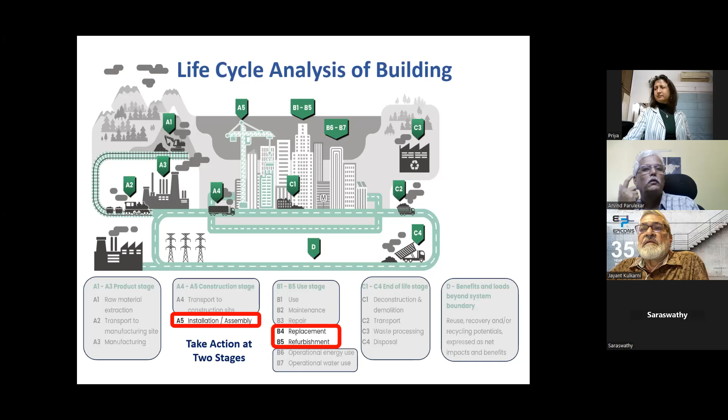EFC has conducted 84 workshops in the past 24 years and 44 webinars, now it is 45 webinars in the last 4 years. We started the webinar series since lockdown through our unit EFC dedicated to training. These are the 2 photographs of physical workshops conducted in the past, workshop 55 and workshop 70. EFC is a humble effort to create a knowledge sharing platform and develop a facility for continued education for practicing architects, structural engineers, corporate consultants, governments and government authorities, builders and developers, and of course, faculty and students.

Today we are at webinar 146, latest technologies in corrosion mitigation and sustainability. And the next program we are proposing is on earthquake engineering. It might be a physical program on 18 January 25.

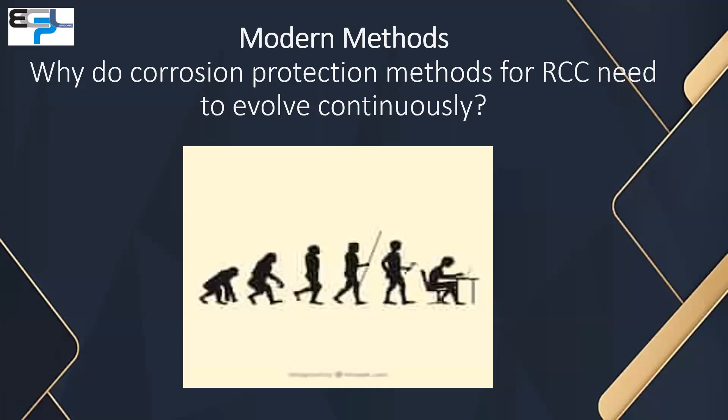I'll be putting my thoughts on why corrosion protection methods for RCC need to evolve continuously.

Corrosion of iron is not new. In human civilization, there was a Stone Age, Bronze Age, and then Iron Age. Discovery of iron is almost 3,500 to 4,000 years old. Variously, it is considered that it was developed in some part of North Africa. Some say that it was in the Sumerian world. But leaving that aside, the history is quite old.

The use of iron was very much important for maritime development, I mean the shipping industry. Seaworthy ships had hulls made of iron, and they faced this problem of corrosion some 250-300 years ago. People found out various solutions like using copper, zinc, various kinds of coatings, coal tar coatings and oil coatings, etc. So this struggle is quite old.

Moving ahead, the oil and gas sector, these are mostly in coastal areas and they face this corrosion problem, and they have developed methods like anodic protection, cathodic protection, impressed current protection, so many things.

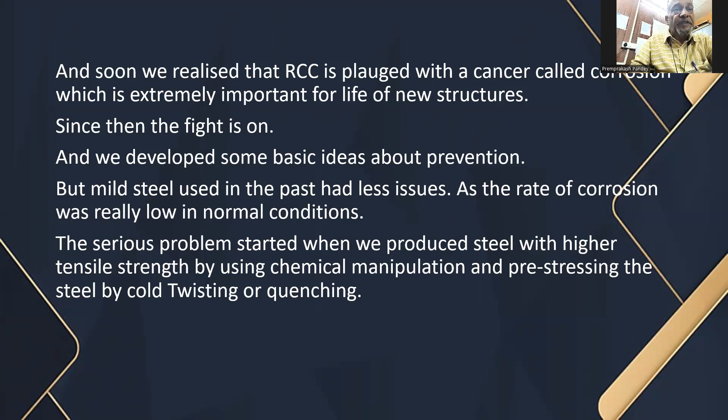Now the basic corrosion fighting mechanism - what we used to do some time back to fight corrosion - had simple formulae: dense concrete with as low permeability as possible, proper cover (all our codes define minimum cover for various elements because the depth of cover is one of the defining characteristics of an RCC element for durability), and third, regular maintenance like painting, and keeping RCC elements away from dampness and stored water, etc.

For a long time, we were putting stress on these three things, and these were effective too. But it has come to our notice that these are no more sufficient. They are effective, but not sufficient. Now let us try to know why it is not sufficient, why we need to evolve, why we need modern and different technology.

There are probably four important factors - there may be many, but I have listed only four. One, constituent materials are changing: cement is getting finer and stronger per unit weight, steel is doing the same thing, and chemical and physical properties are changing. Second, performance demand is changing: earlier RCC structures used to be quite humble, and now we are making massive structures using RCC, and such use demands different kinds of physical properties and performance criteria.

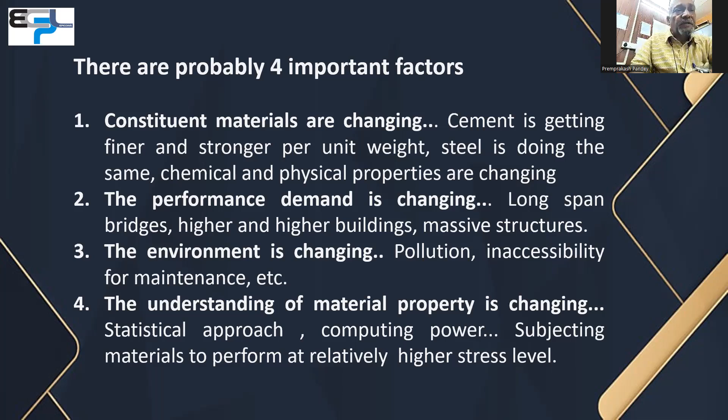So these are the factors making it necessary to evolve our understanding of corrosion. Now, change in material properties - let us say cement. Some time back, we were using cement grade 33, then came 43, then came 53.

Thereafter, number of microfines—microsilica, fly ash, GGBS, and many other kinds of additives are there. Now, pH retention time is reducing as more material gets consumed faster. Why? Because we are using finer material, more surface area is available for hydration in a shorter time. So if you are putting 400 kg of grade 33 cement, complete hydration takes say 60 days; for grade 53, the same thing happens in 15 days. So more material is being consumed, and therefore pH retention time is also reducing.

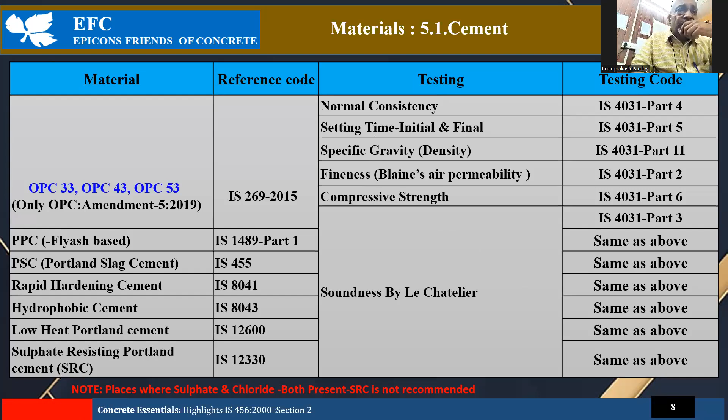Next slide. This is just a table to show OPC 33, 43, 53. Then comes PPC, PSC, rapid hardening cement, hydrophobic cement, low heat Portland cement, sulfate resistant Portland cement. So these are the things changing. Then there are other fine materials, and there are numerous additives. Next.

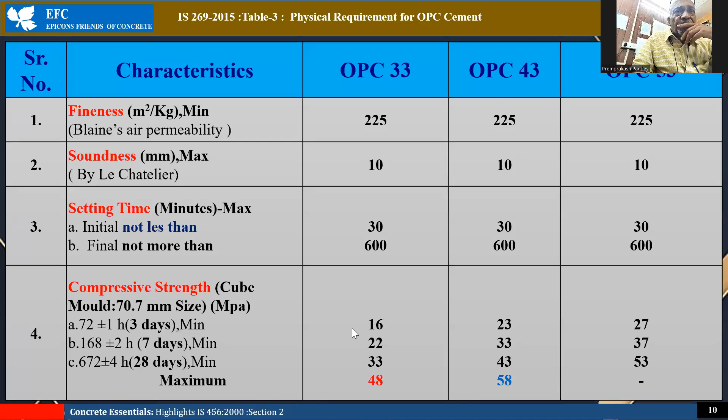Grade 33, 43, 53—various properties. Next.

Now, second is that performance demand is changing—ever increasing scale of structures, as I will show you in the photograph. What exactly is happening is that physical properties are being modified using new materials, pushing the limit of working stress towards the fatigue threshold. We almost don't go to that extent, but it is moving in that direction. Concrete, RCC, is subjected to a higher stress level than it used to be some 50 or 60 years ago.

Environment is changing too, as I will show in some photographs. Carbon dioxide is increasing due to fossil fuel consumption. Sulfur oxides are also increasing in the atmosphere, and sometimes there is acid rain.

And when I say increasing use of untrained or poorly trained workmen, I take it as an environmental factor. In the construction industry, the demand of development is so high that there is an acute shortage of trained workmen, and that is being fulfilled by partially trained or untrained people. Because of that, very important factors like maintaining proper cover all along the RCC structure elements, quality of cover despite very heavy reinforcement, and commercial pressure to keep thin members—thin columns, thin beams, especially in the residential sector—become environmental pressures, including commercial pressure for designing structures which have inherent potential for deficiency. All this has to be taken into account while we think of mitigating the rate of corrosion.

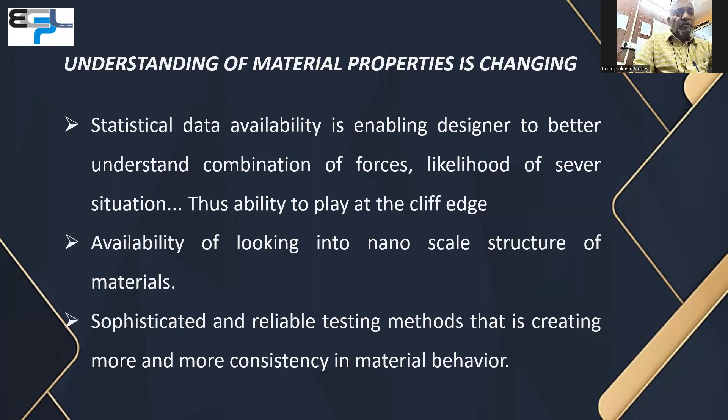Now we are talking not about microscopic understanding, but about nanoscopic understanding of material. So you will see in the next slide.

These are important for the binding property of the cement, the forces which are called van der Waals forces. These forces are surface attraction forces because of the closeness of different molecules, and these are other than electromagnetic forces. They are developed because of the close proximity of different molecules.

Now this is the kind of understanding we are having, how actually the cement develops binding property, what kind of crystal formation is there, how we can increase those kinds of fibrous elements and crystals which create better strength or better bonding. And that is giving us ideas about making cement more efficient.

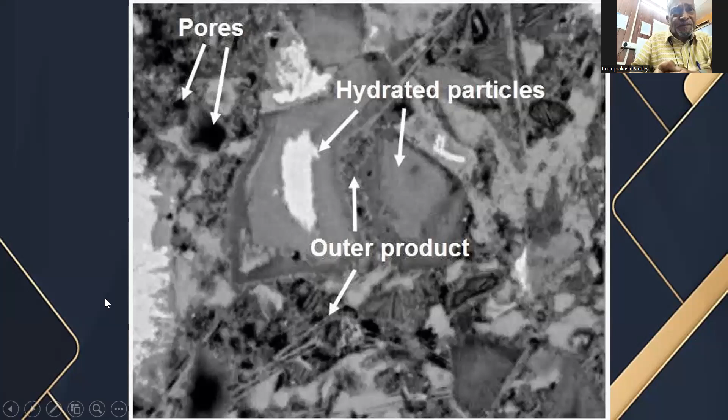See, this is an electron microscope photo of the surface of a cement particle. Can you imagine what kind of insight science is giving into understanding of material? This is mind-boggling, and this is helping scientists and production engineers create new technology for better material, for better chemical manipulation of the material. So this is changing the material properties like anything.

We could compute data and explore the trend of the data, which is very important for producing material with great consistency. In all engineering structures, consistency in the behavior of the material is very, very important. Our design is based on assuming certain consistency, certain repetition of behavior, certain percentage of failure. The more data we have, more experiments we do, more practical data we gather from the field, the better understanding we have of the material, and as I said earlier, better we can push the limit, and we can make the material perform at higher stress levels.

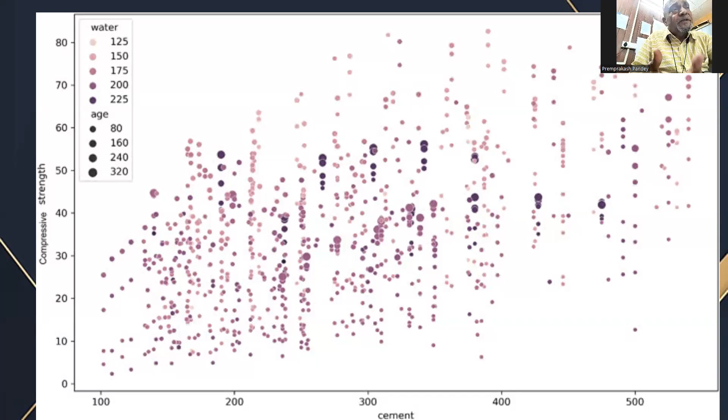As concrete is changing, cement is changing, steel is changing, as the use is changing, it is creating an environment where corrosion is faster. And similarly, the corrosion fighting mechanism is also evolving and changing. We are getting new insight, and therefore there is new kind of material, organic and inorganic. Some of the methods which we are using may not be new.

Some of the methods use zinc. The use of zinc is as old as the shipping industry, when steel ships with steel hulls were constructed before steam ships. The major problem was corrosion of the hull, because it used to be in seawater. People started using zinc as a mitigation measure, since galvanizing uses zinc. Galvanized iron is quite old technology, not new.

However, use of zinc as a sacrificial anode in concrete is not old. It may be very recent in our country, but it has been used for a couple of decades in Western countries which face corrosion as a major problem. So some of what we call latest technology is repurposing of well-known methods, being brought into the building industry.

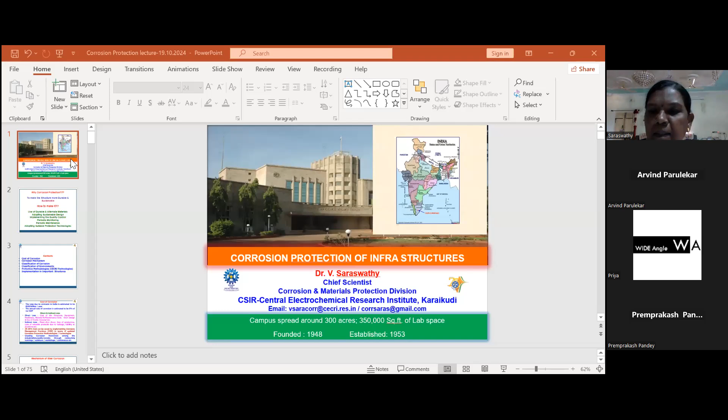So today's topic is corrosion mitigation and sustainability. Why do we have to mitigate corrosion? If you are mitigating corrosion, you are making the structure stronger, more durable, and more sustainable. How to make it? By using durable materials - if you use the same material for a long time, it may get depleted, so you have to use alternate materials. Then adapting sustainable design, implementing proper quality control techniques, periodic monitoring of structures, periodic maintenance, and adapting suitable protection technologies.

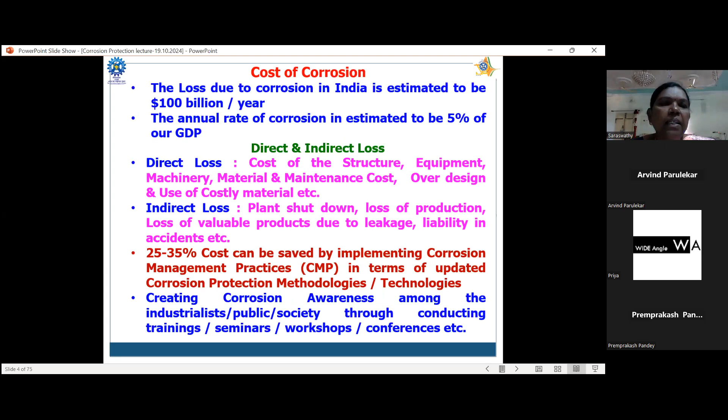The loss due to corrosion is said to be around 2 to 5% of our GDP. The losses are divided into direct loss and indirect loss. Direct loss includes cost of structure, equipment, machinery, material, and other maintenance cost. Indirect cost includes plant shutdown, loss of production, loss of valuable products, etc.

If you are adopting suitable technologies, you can save 25 to 35% of the cost by using the latest corrosion mitigation technologies, and also by creating corrosion awareness among industrialists, consultants, and society through conducting seminars, workshops, and webinars like this get-together. So I am not going very deep into corrosion because I have many slides.

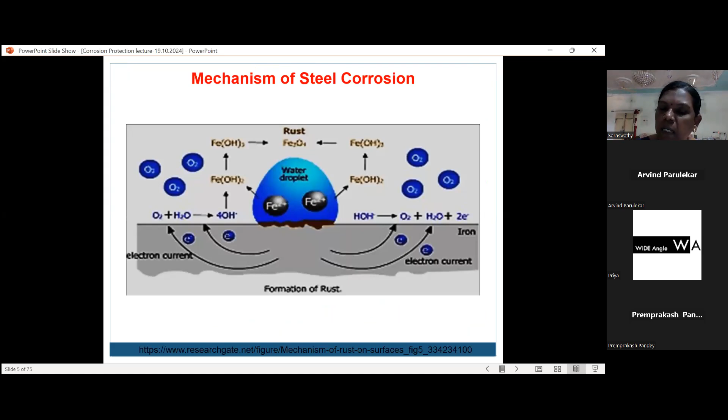Corrosion mechanism: if you expose material to the environment, it gets corroded using atmospheric contaminants present in the atmosphere. Iron, when oxidized, becomes 6 times more voluminous than the parent material. So the volume increases and ultimately the stability of the product is affected.

Corrosion is classified into dry corrosion and wet corrosion. Dry corrosion is a slow process, but wet corrosion is a fast process. Dry corrosion takes place at high temperature, but wet corrosion takes place at room temperature.

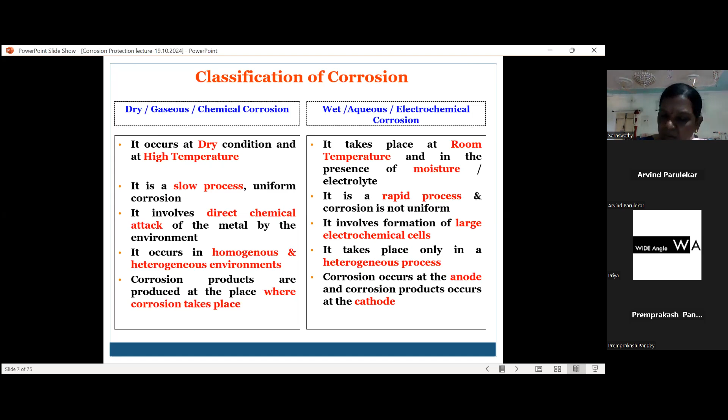Majorly, SCC corrosion is stress in the presence of environment causing stress corrosion cracking. This is present in underground pipelines and other important structures.

The classification of environment is based upon ISO 12944. Normally the classification is divided into C1, C2, C3, C4, C5, and CX. CX is the extreme corrosive environment - offshore areas that may contain high salinity, industrial contamination, and high humidity. Normally we encounter industrial environments with high humidity and aggressive atmosphere, which is C5 environment. CX is the recently added environment in the ISO 12944 code, said to represent extreme environmental conditions.

If you are using some paint in a C1, C2, C3, C4, or C5 environment, you have to test that paint as per ASTM B117 to know its durability - how many hours it can withstand. If it passes 1440 hours, then the paint may be durable for over 7 years. If it passes over 2000 hours, then we say the paint may last 7 to 15 years. Based on that observation, we concluded that if the paint passes 1440 hours, it will last for seven years.

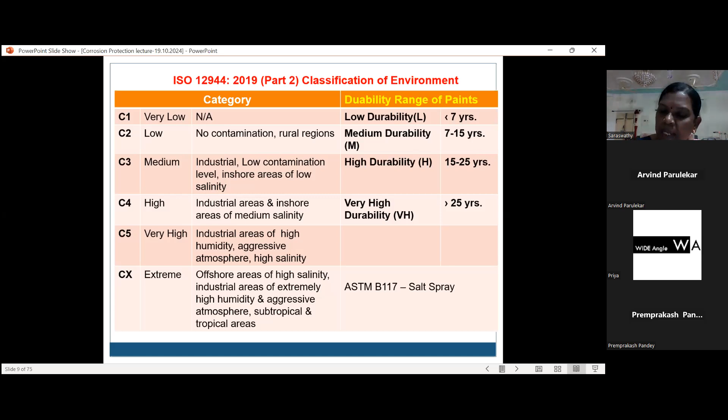So if it is passing more than 1440 hours, the paint will last for 7 to 15 years in the highly aggressive environment as per ASTM B117. So this is the durability of the paints we have tested, and for high durability paints, we can't guarantee any paint having higher durability, but as per standard, high durability paint will last for 15 to 25 years. But as per the prevailing situation, no paint will last more than 15 years as far as my experience is concerned.

So these are the corrosion protection methodologies. Normally we are following some paints and coatings, inhibitors, and cathodic protection. Other than that, these are the most followable methods. So paints and coatings, whether temporary or permanent protection, will give that protection.

So inhibitors may be anodic, cathodic, mixed inhibitor, VPI inhibitor, and green inhibitor. These are all examples of anodic, cathodic, and mixed inhibitors. Recently we are using bipolar inhibitors also, which is like a mixed inhibitor. So in cathodic protection, we are using sacrificial and impressed current systems, and anodic protection for particular protection of structures. Alternate improved materials are also used depending on the environmental conditions.

So what is the difference between paints and coatings? Paint is used for decorative application, and coatings are used for barrier or permanent protection. So paint is for temporary or permanent protection, but coatings are used for extended life of service. These are all the common terms which I am using - I am not going to discuss them in detail.

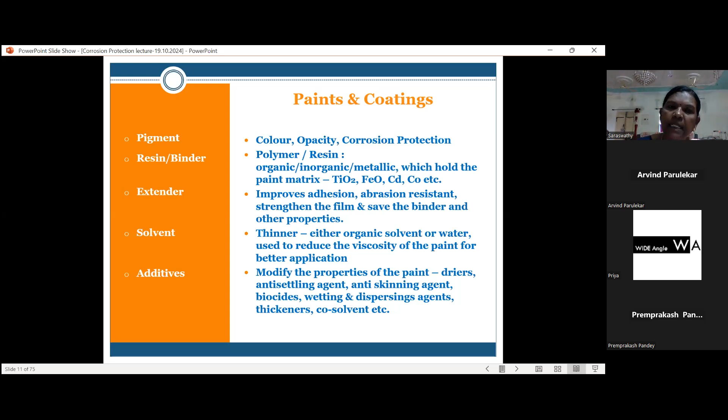So regarding sacrificial protection, the previous speaker has talked about it, but at CECRI we have developed sacrificial anodes for the protection of ship hulls, jetties, and underground pipelines also. Normally sacrificial anodes are used for protecting underground pipelines as well as jetties and other important structures. It need not require any external input or external power supply, but for impressed current system, it needs external power supply. So this is a major difference between the sacrificial system and impressed current system.

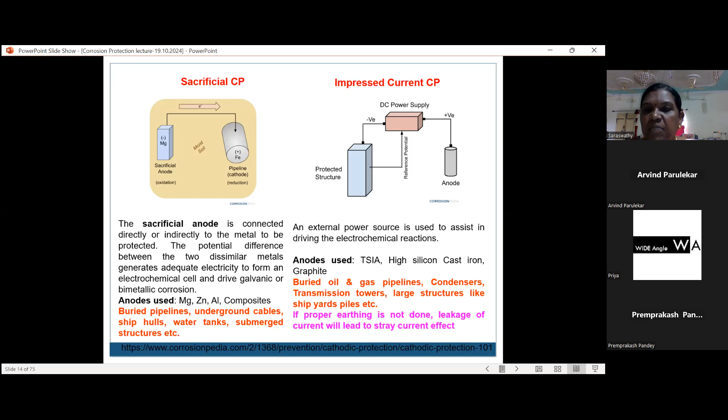In sacrificial systems, we use sacrificial anodes like magnesium, aluminum, and zinc as the anode. In impressed current systems, we use more noble metals as the anodes, like MMO, graphite, and other anodes. We also normally use high silicon cast iron as the anode for the impressed current system. So this is the comparison between sacrificial and impressed current systems - I am not going to go into detail.

So in CECRI, we are dealing with the corrosion and materials protection division. We are dealing with almost all the protective methodologies. For concrete corrosion, we have developed inhibitors. For cathodic protection, we have developed our own anodes. For biocorrosion, we have developed biocides. We have also developed inhibitors for both oil and gas industries, and we have been doing failure metallurgy and failure analysis of underground gas pipelines and other important industrial structures.

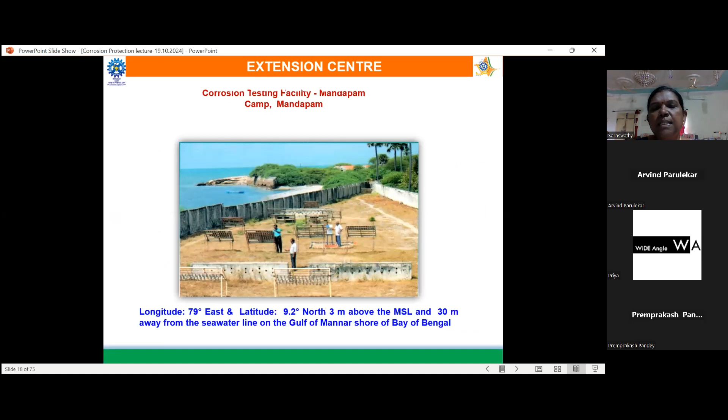So our main unit is placed in Karaikudi, and another small unit is placed at Rameshwaram. This unit is said to be the highly corrosive zone in Asia. We have collected the corrosion rate by exposing various materials over a period of 10 years, and found that this site is said to be the most corrosive zone in South Asia.

So we have carried out an extensive corrosion map of India by exposing these materials all over India, selecting 56 exposure stations. We did this from 1993 to 2004, producing a corrosion map which was very highly useful to almost all the industries.

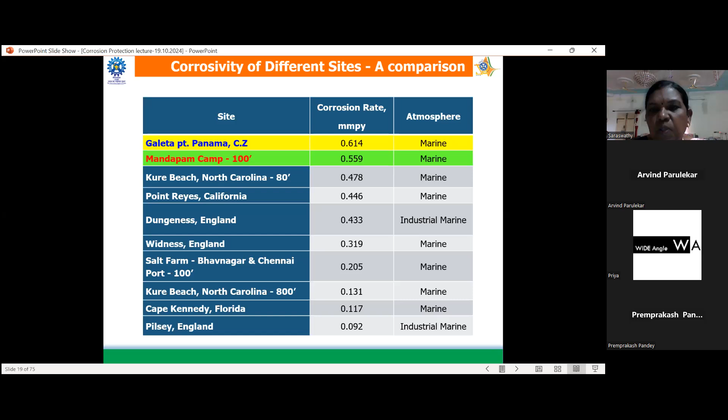The first one is a cement slurry coating, which consists of inhibitor plus cement. This is a 4-step process, and this technology has been used in the Pamban Bridge, located near Rameshwaram, the birthplace of our past president Abdul Kalam ji. This bridge is coated with inhibited cement slurry coating for the rebars, and presently it has been coated with the 4-coat system for protecting the external concrete surface.

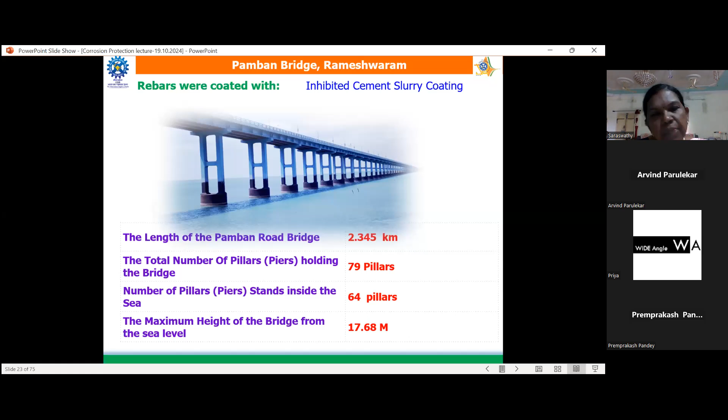Both these technologies were developed by CECRI, and till today the bridge is withstanding and sustainable because of the CECRI coating given for both the steel rebars and the concrete surface. Once in 4 years, the CPWD implements the 4-coat system for the entire bridge structure, and we go to the site for quality control of the bridge.

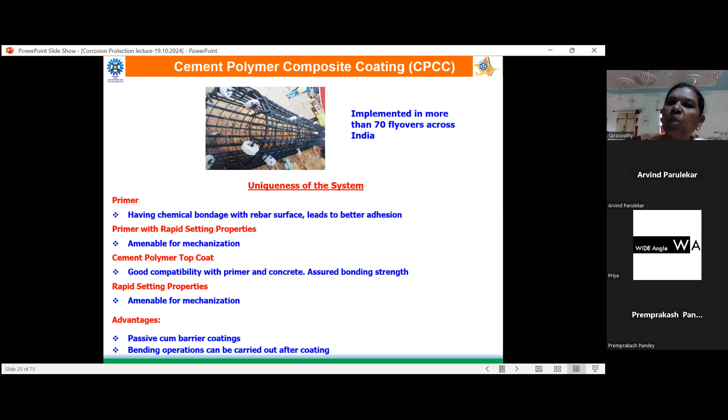This is the improved version, cement polymer composite coating. Here it contains cement plus polymer, whereas the earlier system contained cement plus inhibitor, a water-based coating. This new system has the added advantage of flexibility, which the previous coating did not have. This system has been implemented in more than 70 flyovers across India, with all these characteristics and features.

Each coat has its own significance. The initial first coat gives adhesion to the concrete surface, the second coat gives barrier protection, the third coat, since it contains TiO2, is highly weather resistant with breathing capability, and the aliphatic polyurethane coat is highly UV resistant.

This is the system which we have recently tested on this 100-year-old bridge under reconstruction in Rameswaram, the railway bridge. For the first time in India, they have used stainless steel rebars for the construction of piers and pillars, and they have used metallizing zinc epoxy, these two types of coating, for the entire bridge including the lift span. We tested this coating at CECRI and found that the system performs well in this harsh marine environment.

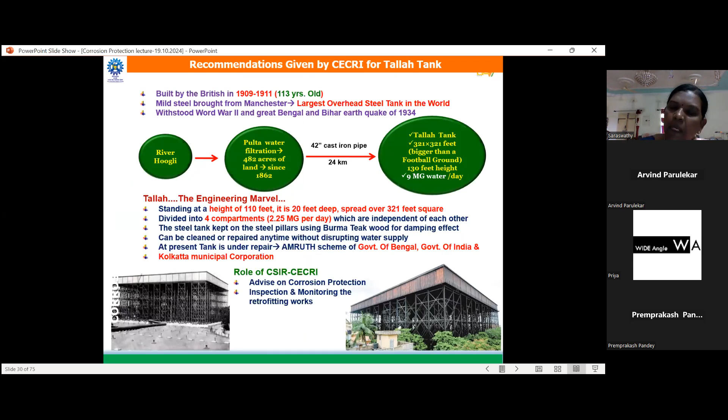We recommended internally the food grade epoxy, and externally we advised them to use zinc rich epoxy primer as well as polyamide epoxy and UV resistant aliphatic polyurethane for the external surface. For the internal surface, we recommended food grade epoxy since they are using it for drinking water purposes. The size of the tank is very big, more than a football ground, and they have completed the renovation. Now it is kept under use.

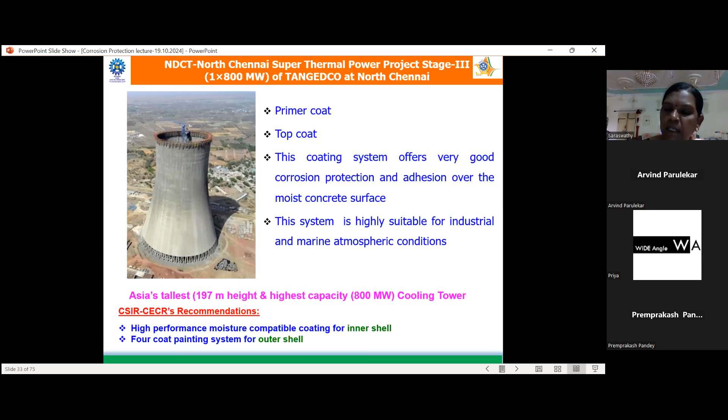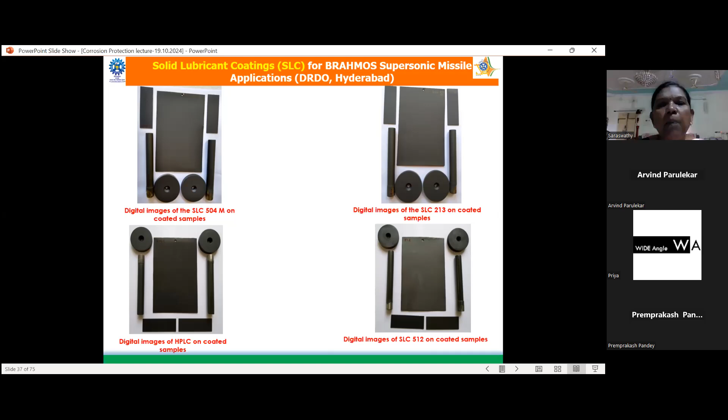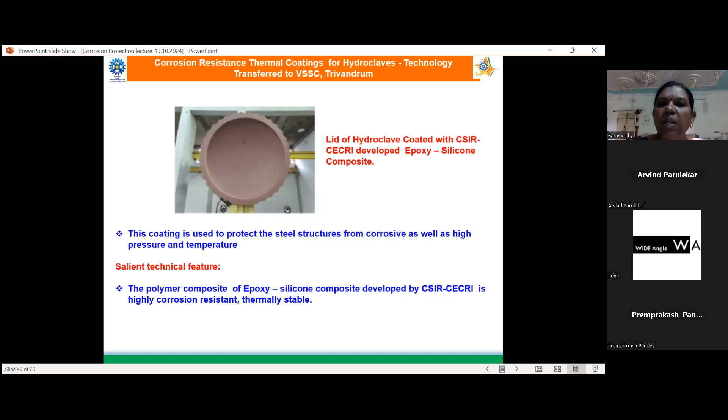They have been using this technology for protecting offshore jetties and other important pipelines. And this is another important technology which has been developed by us for protecting thermal coatings for hydroclaves. This technology is also for ISRO. We have developed a silicone composite, high temperature silicone composite coating, and this technology has been transferred to ISRO.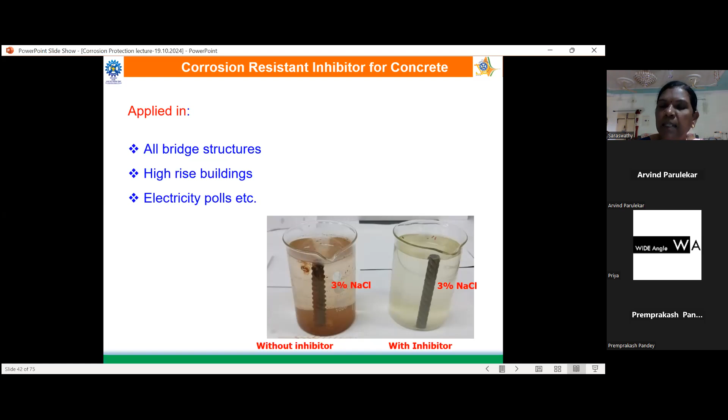So this is another important technology for concrete structures, highly based on inhibitor. Normally we use Portland pozzolana cement, which contains 25 to 30% fly ash. This fly ash contains some carbon and sulfur, which creates corrosion of rebars. To protect against that, we have developed this corrosion resistant inhibitor, and this technology has also been transferred to many licensees across India, and they have been using it for erection of electric poles and other important structures.

So this is another important project which I was involved in. This project was under construction in 2000. I stayed there for 2 or 3 years, and we installed our own sensors. This is the first cable stay bridge built, the Naini bridge, which was commissioned in 2004.

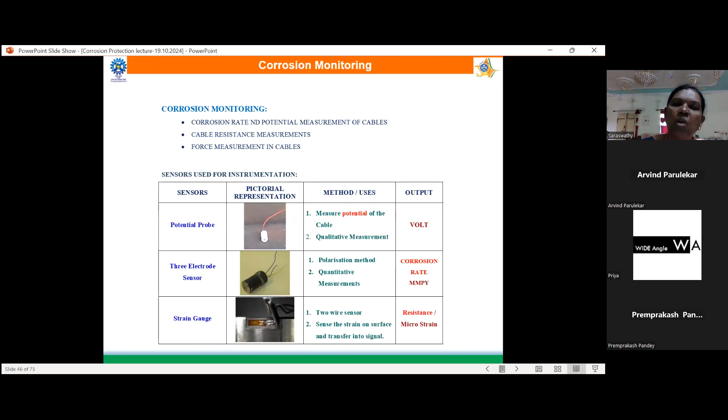During that period, we installed almost all the sensors: accelerometer, vibration sensor, all types of sensors, and the corrosion measurement sensors were made by us and also installed in that bridge. Over 5 years we monitored that bridge, and then it was handed over to the government.

So this is another important project which I took part in, the Kudankulam nuclear reactor, Kaiga reactor, and Tarapur nuclear reactor, for which we developed our own integrated sensors. Earlier we had been importing that sensor from abroad. After that, we developed our own integrated sensor and placed it in the dome for monitoring corrosion, chloride, humidity, resistance, and other parameters. This is another atomic power station where they have used our own sensors.

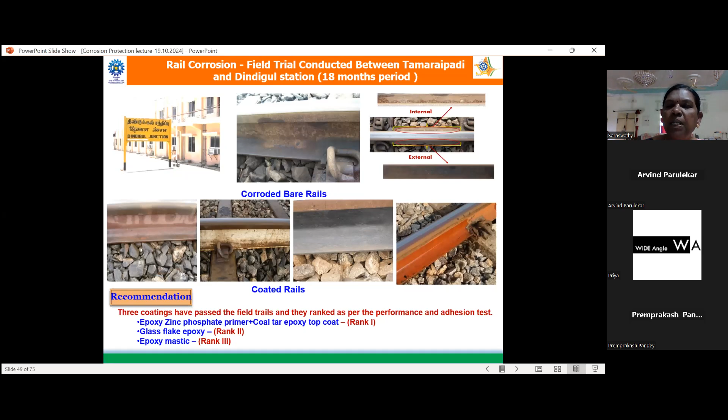So this is another important project which we carried out for RDSO. Normally during the morning hours, due to excreta and urinals, the rails get corroded. So they wanted us to develop a coating, and we developed 3 types of coating and tested them on the rail over a period of 1.5 years. We found that an epoxy zinc phosphate primer with a coal tar epoxy top coat performs better, and we handed over this system to RDSO.

And this is another important project we carried out for the Sardar Sarovar Dam project in Gujarat. Between 2011 and 2016, 18,000 tons of steel were left over in the ground. While they wanted to use it again, the government approached us, and we carried out an extensive survey over 5 years. We recommended that 90% of the plates could be used for the construction of the dam, and we submitted the report.

Because we have carried out the previous project for this Sardar Sarovar dam project, after that they made me one among the members of the dam safety board.

So their approach recently, the steel minister visited the Tungabhadra dam. It is 70 years old, and they wanted us to examine whether the life of the structure can be extended or it can be abandoned.

Normally the life of the structure is only 45 years, but we found that we don't find any single piece of material left over for examining the quality of the material.

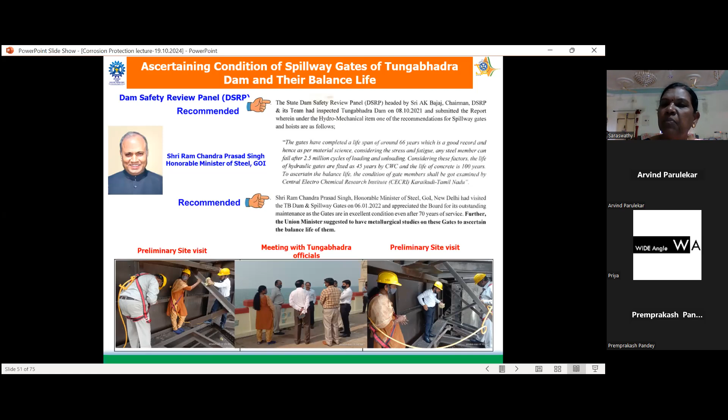We should not touch, we should not damage any of the steel, but we made our own measurements - cavitation measurements and other non-destructive measurements - and found that most of the spillway gates and skin plates...

...will last for another 50 to 60 years. So the government is going to save nearly 300 crores by making such type of assessment.

My team and myself visited the site. We stayed over there and took all the measurements, and we have submitted the remaining life of the dam. So this is another important project.

Everybody knows that this Thiruvalluvar statue is located in Kanyakumari, that is 133 feet height, located in the middle of the sea. So it is getting, due to the high tides and low tides, eroded.

So to prevent erosion, they wanted us to have some protection technologies. We have recommended to use silane siloxane based coating. Once in 4 years, they are doing the renovation and we are supervising it.

Along with the TTDC and archaeology department, I was made one among the members of the expert committee. Once in 4 years, they are doing it and we are monitoring the structure.

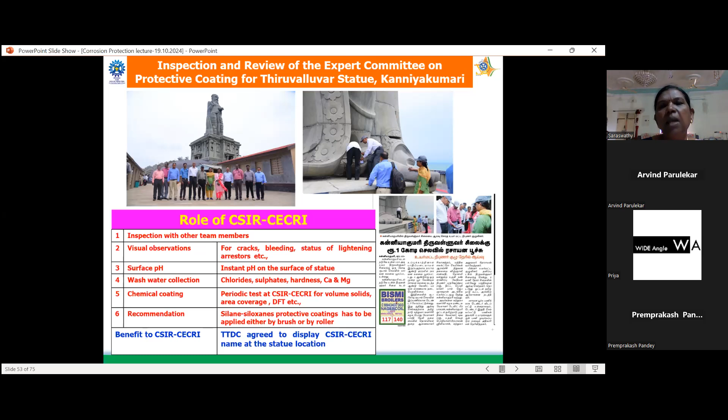So this is the type of coating which we have recommended, and they have used it, and they are also recoating the statue once in 4 years.

This is an integrated sensor gadget developed by us, and this has been implemented in the Kudankulam nuclear reactor, as well as single sensors installed in NFC Hyderabad, the zirconium sponge plant, and even in Naini Bridge.

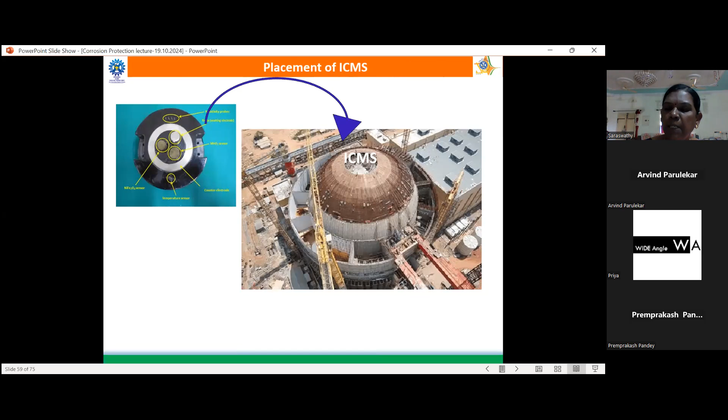We have installed a single sensor for monitoring the corrosion rate of the steel. This sensor gadget contains 5 or 6 parameters, but now we are implementing a single sensor for measuring the corrosion rate as well as potential.

We are implementing the sensor also in NFC Hyderabad. We have installed this sensor in Hyderabad. So this is another important project which we have recently completed.

This is the railway project, the Chennai Metro project. They have been encountering rail corrosion as well as hook corrosion issues. We went there, and almost all the tunnels also are encountering seepage issues.

We have recommended suitable coatings. After making the measurements, we recommended they use another type of coating. We asked them to modify the system, and now they are implementing it. During implementation, we are supervising the quality control of the painting system.

So these are all other important projects which I have been one among the members of my team for. Indian Oil Corporation encountered some corrosion issues, so we recommended using a cathodic protection system for the existing tank bottom. So far they have not implemented any cathodic protection system for the existing tank bottom, which has been corroded and repaired with some new plates.

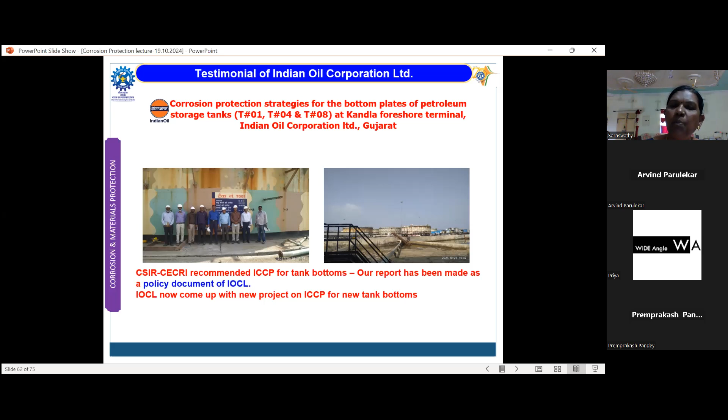So they have been implementing it, and we are going to monitor the CP for the existing tank bottom.

Now we have asked them to modify the glass flake type of coating for the internal and external system. They are using 9 different types of coating, and we have given the modified recommendation for them.

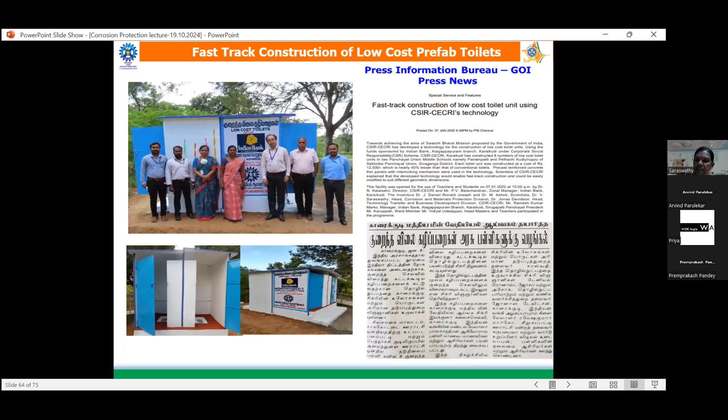This is another important technology which we have developed recently, and this has been implemented in some schools in and around our village. So this is another important project.

This is for Indian borders. Some of the borders are located in agricultural areas, and some are located in acidic environments. For them, we have collected fence materials from different companies and evaluated them, and recommended 2 or 3 important combinations of coating.

CPWD is implementing that coating, and during implementation we are monitoring it. As I said, we have a trust called the National Corrosion Council of India. It was started in 1991, and so far we have conducted 42 conferences, seminars, and other workshops.

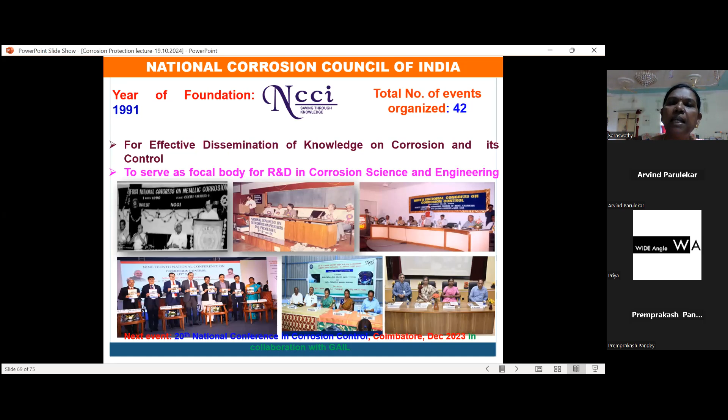During that period, in 1993 itself, we started this corrosion map of India. Over 57 field exposure stations we exposed the materials, and that exposure was taken over a period of 10 years. The corrosion rate was collected and classified as severe, moderate, and low corrosion zones.

We found that corrosion is site-specific data. We exposed 4 or 5 materials and collected that data, and it was circulated to many industries. After that, we have not updated the data. Now we are approaching our CSIR for updating the corrosion map of India.

These are all the conferences we have conducted. In addition, we are conducting industry-oriented courses for the benefit of industries as well as students and academic persons. Based upon their request, we make tailor-made specialized programs for their requirement.

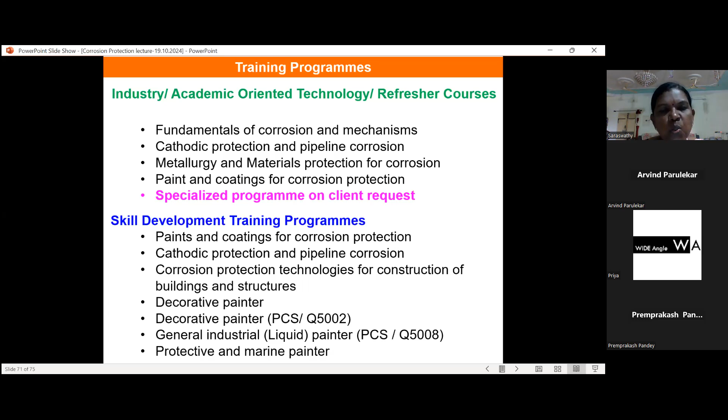We have collected 57 exposure stations. We exposed 4 different types of material: mild steel, zinc, galvanized steel, and aluminum. We collected the data, and this collected data was highly useful to industry. But now the climatic condition has entirely changed.

Since many of our senior staff have retired, we could not go ahead. Now we are approaching our government as well as oil and gas industries, and also many NTPCs, who are willing to come forward to expose our materials and collect the data. So now we have started collecting the updated corrosion map of India data by exposing our materials in a few locations. Thank you very much.

Thank you, ma'am, that was really wonderful. In 45 minutes you took us through so much - technologies to prevent corrosion, wonderful projects including flyovers, bridges, beautiful buildings, tanks that are 113 years old, thermal power, and so much more. I'm not going to go through all of that now. Whatever you told us was full of technology, and as an architect myself, I found it so interesting that corrosion can be such an intense topic, and yet what it does to beautiful structures is amazing. So friends, thanks a lot, Saraswathy ma'am, for that.

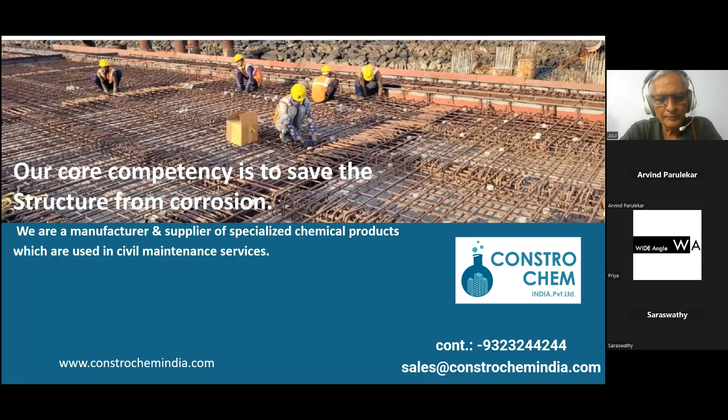For today's presentation, the topic is development and quality control of products for corrosion mitigation. Today's focus is prevention or minimization of corrosion of steel used in construction. To address this problem, large numbers of products are available, commonly known as construction chemicals. This presentation attempts to throw light on development and quality control of these products, including information about Constrochem products used in corrosion mitigation.

In earlier presentations, you heard a lot about which products are recommended for different corrosion related problems. But why those products are to be used, with their ingredients and content, needs explanation. Today, engineers and architects refuse to buy your product as a black box. They wish to know what science and technology has gone into development of those products, and what can assure quality of those products which they are advised to use for corrosion related problems.

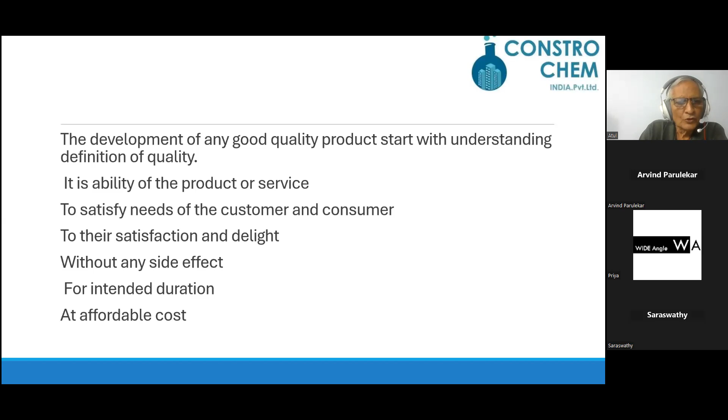Over a period of time, the concrete structure is expected to give the same quality performance from the date it is erected. So, in the present context, the product must have the ability to prevent or minimize corrosion.

Customer may be an engineer or architect. In the definition of quality, we mentioned satisfaction of customer and consumer. Now, customer is the one who selects the product depending upon its properties, and consumer is the one who normally uses the product. So the quality of the product should be such that it satisfies both the customer as well as the consumer. In selecting a product, a consumer is a contractor using the product.

As far as the side effects of these corrosion related products are concerned, it may relate to safety and handling of these products, or the effective duration for such products should be as long as possible. Being a commercial product, the cost should also be competitive.

Now, when we think about the information which must be given to our prospective buyer about what considerations have gone into development of the product, the steps of product development involve design qualification, installation or application qualification, operational qualification, and performance qualification.

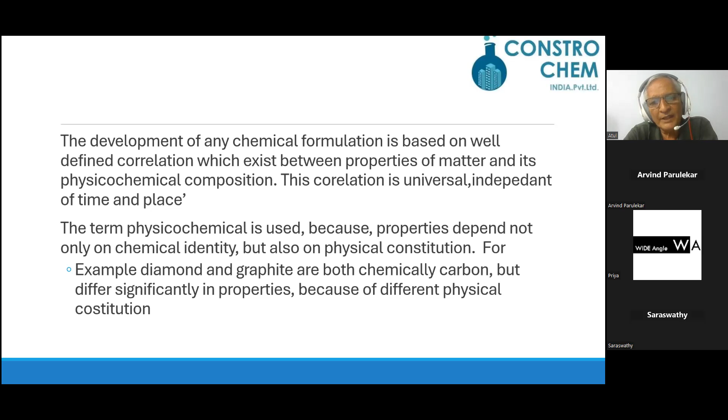In the earlier presentation, it was mentioned that mild steel is less prone to corrosion than pre-stressed steel. I was not aware of that. So any physical change in the steel also leads to a change in corrosion ability, which is new information for me. The term physicochemical composition used the example of diamond and graphite, both chemically carbon, but differing significantly in properties because of differences in physical constitution.

A product made to meet quality requirements may be a mixture of different components selected based on their properties. Now, what we are talking about is what considerations go into development of a product used in mitigation of corrosion. When such a product is developed, it may not be made of one single homogeneous component, but of many different components forming the final formulation.

After clearly understanding the quality requirement of the product, the next step is selection of appropriate ingredients based on physical and chemical properties. For example, silica is selected as a filler because it is chemically inert, and the physical state chosen is microfine to make the structure dense.

After selection of all components at the qualitative level, the next step is quantitative, which determines the percentage of each constituent in the formulation. In a two-pack formulation, the relative proportion must be decided. The next step is selection of appropriate equipment and methods to blend all the ingredients.

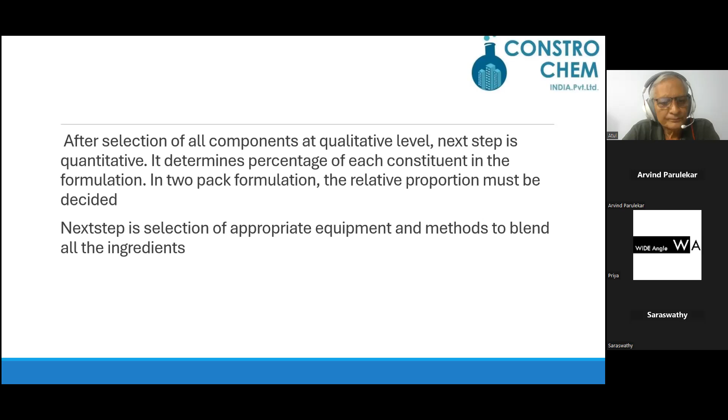After the design qualification, when you have selected all the required components qualitatively and quantitatively, the next step is application qualification, which decides the suitability of the product for use by testing parameters like viscosity, spreadability, or usable life of the pack after mixing.

The area where the product is to be used may not be easily accessible—a factor to consider during application qualification. In a product used for coating, the thickness of coat or sequence of coats in a multi-layer product should be mentioned. In an earlier presentation, there was talk of a four-coat formulation for prevention of corrosion, to be used in a particular sequence.

What matters here is what ingredients are chosen for those coats and why they have to be ordered or applied only in that particular order—what is the mechanism of their action if the order is reversed or the composition is changed. That is the kind of information users are now looking for. Any product to be used in the form of a spray should be tested for its ability to be used as a spray.

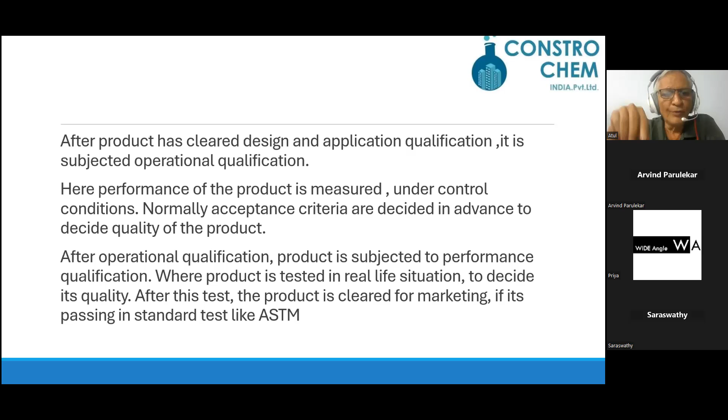After the performance test is satisfactory, the last step is preparation of a standard operating procedure, or SOP, documented to ensure reproducibility of quality across all batches—important because chemicals come into the market from different batches. To ensure reproducibility of quality in all batches, all steps involved in the manufacturing process are chronologically listed with full details and approved by a competent authority.

All of you may be aware of what good manufacturing practice is. This documentation forms part of GMP. Now this is the part mainly related to what goes into the development of products which are used in mitigation of corrosion.

As far as the selection of content is concerned for mitigation of corrosion, I have not talked about the factors which govern corrosion. Corrosion may consist of electrochemical corrosion or chemical corrosion. Electrochemical corrosion consists of 4 components: cathode, anode, electric current, and ionic current. While selecting or designing a product, these 4 parameters are taken into account, and accordingly the components of the anti-corrosion formulation are selected.

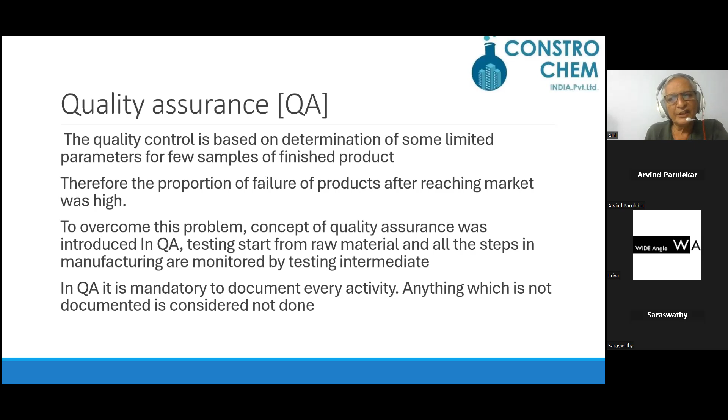Okay, thank you. The next step in quality is total quality management, which covers all departments of the company. All efforts are made to satisfy the customer and consumer.

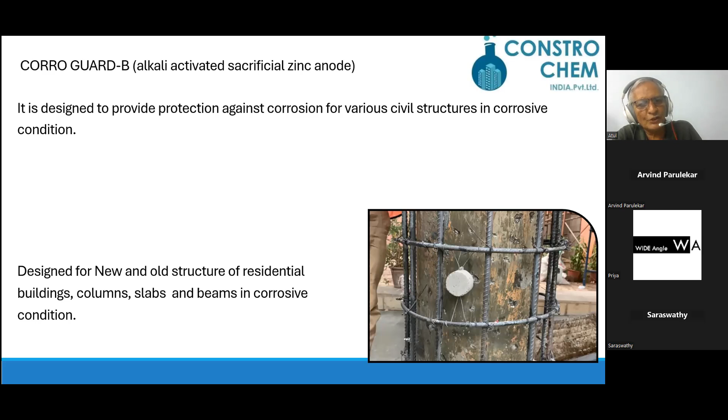As mentioned earlier in this presentation, I wish to give you an introduction to the products of the company. This covers different products like Corroguard, which is designed to provide protection against corrosion for various civil structures, designed for new and old structures including residential buildings, columns, slabs and beams in corrosive structures.

Corroguard S is designed to provide superior protection against corrosion of columns and jetties in high corrosive and aggressive saline conditions. It's a specialized mortar covering with pH 14, specially designed for columns, cooling towers, bridges, and dip structures.

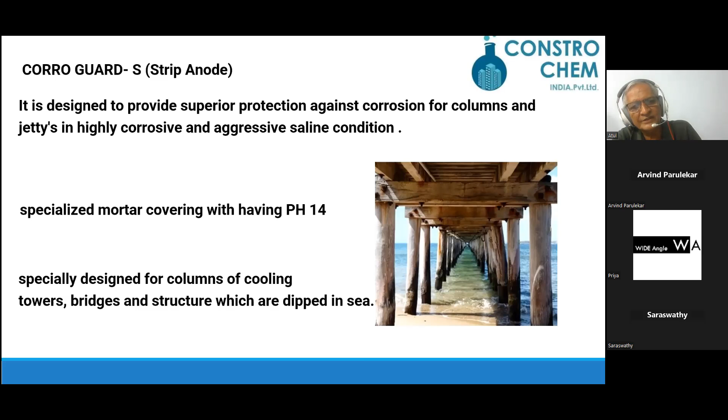Corroguard tablet is a bipolar corrosion inhibitor designed to protect metal surfaces and reinforcement bars from corrosion and enhance concrete durability. It forms an ionic layer over the steel bar, pushing the negative charge ions away from the metal surface. The best advantage is that it's effective in humid conditions.

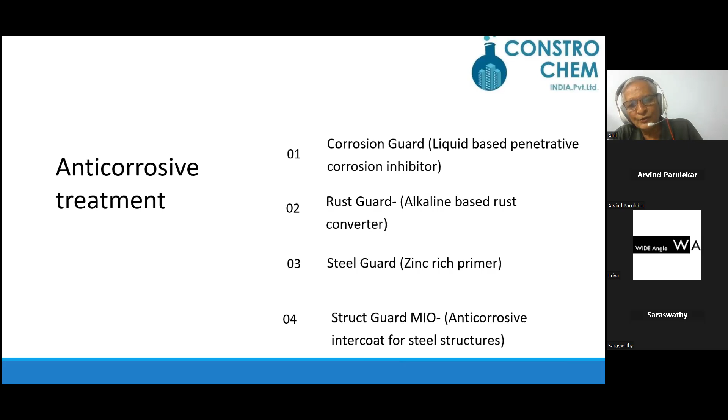Corrosion guard is a liquid-based corrosion inhibitor. Rust guard is an alkaline-based rust converter. Steel guard is a zinc-rich primer. Struct guard MIO is an anti-corrosive intercoat for steel structures.

Corrosion guard is a liquid-based penetrative bipolar corrosion inhibitor. It is applied as an impregnation by spray, roller or brush onto the surface of the concrete. The corrosion inhibitor penetrates into the concrete and protects the steel by forming a protective film on its surface. The advantage is it helps to degenerate the anode and cathode over the steel bar by forming an ionic layer.

Rust guard, an alkaline-based rust converter, is a single component liquid that removes rust and prevents rusting of steel structures by providing a passivation coat. Advantages: converts rust into a stable inert substance, stops rust progression, and prepares the surface for coating or painting.

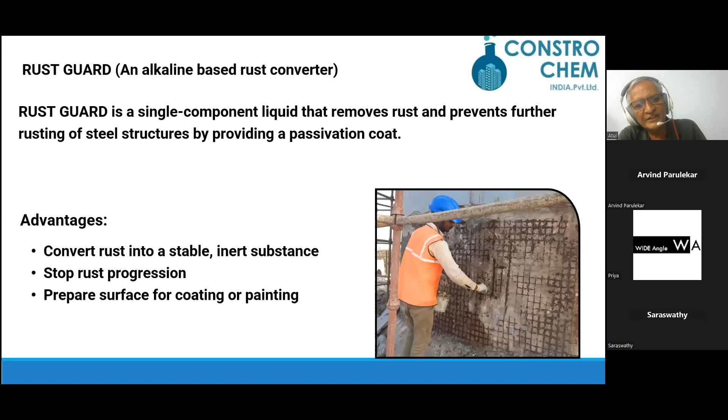Steel guard is an epoxy-based zinc-rich primer. It is a 2-pack epoxy-based metallic rich primer designed as an anti-corrosive primer for protection of steel. Advantages: easy to apply, fast curing, good bonding to metal, high weather resistance.

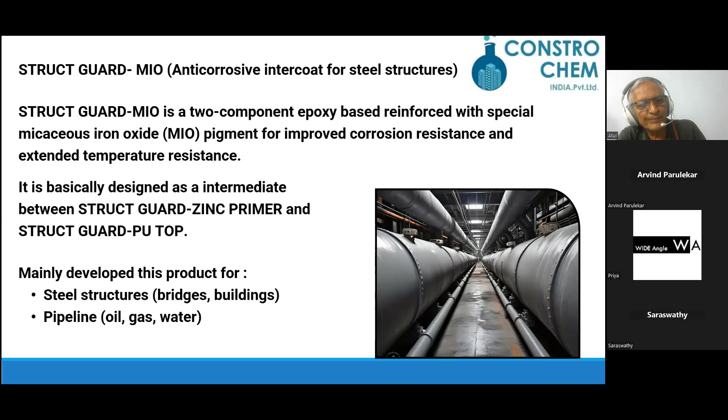Struct guard MIO is a 2-component epoxy-based product reinforced with MIO pigment for improved corrosion resistance and extended temperature resistance. It is designed as an intermediate coat between struct guard zinc primer and struct guard PU top. This product was mainly developed for steel structures and pipelines.

Structure repair: Repair guard is a fiber reinforced corrosion resistant thixotropic repair mortar. Repair guard Epox mortar is an epoxy-based anti-corrosive repair mortar. Ground guard epoxy LVMT is a low viscous moisture tolerant grout mortar.

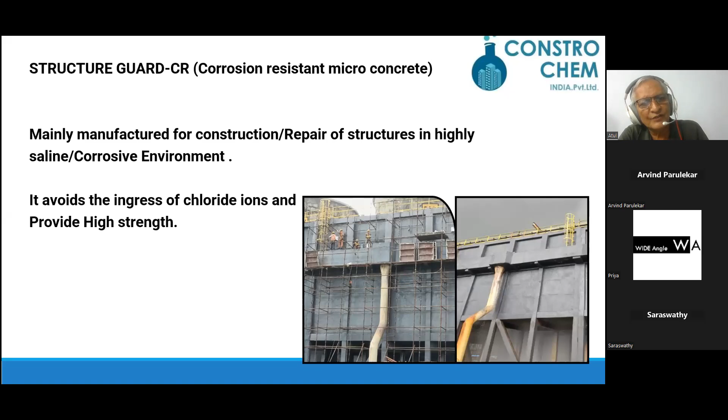Structure guard CR is a corrosion resistant micro concrete, mainly manufactured for construction and repair of structures in highly saline corrosive environments. It avoids the ingress of chloride ions and provides high strength.

Repair guard F is a fiber reinforced corrosion resistant thixotropic repair mortar. It is a general purpose, non-sagging, thixotropic, high strength formulation for structural concrete repair, offering extremely low permeability to water, carbon dioxide and chloride.

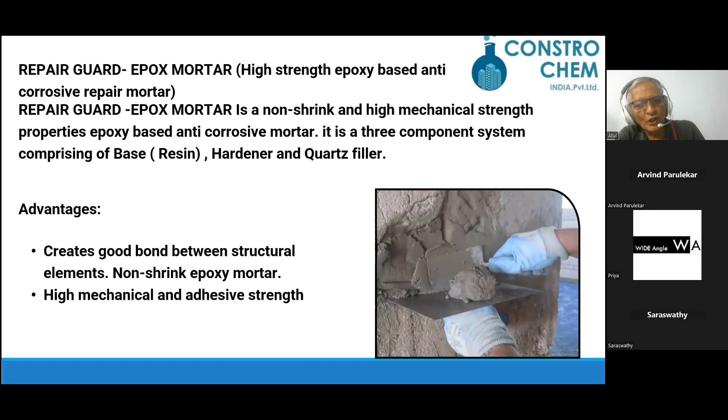Repair guard Epox mortar is a non-shrink, high mechanical strength epoxy-based anti-corrosive mortar. It is a 3-component system comprising base, hardener and quartz filler. Advantages: creates a good bond between structural elements, non-shrink epoxy mortar, high mechanical and adhesive strength.

Grout guard Epox LV is a low viscosity epoxy system comprising resin and hardener with a mixing ratio of 2:1. This system has an excellent bond with the concrete structure and can penetrate into the finer cracks present in the concrete. Advantage: it resists the ingress of chloride ions.

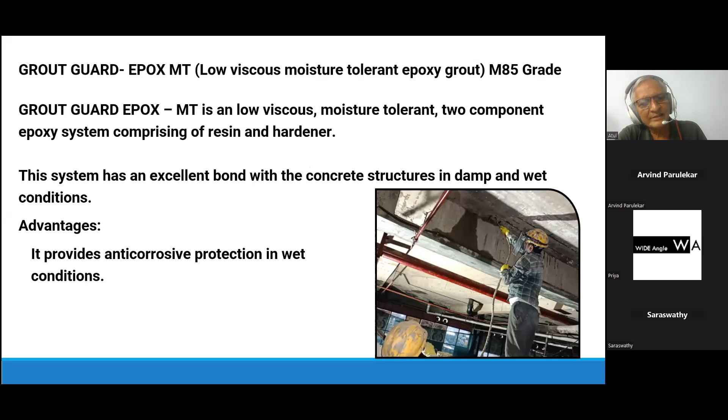Grout guard Epox MT is a low viscous, moisture tolerant, two-component epoxy system comprising resin and hardener. This system has an excellent bond with the concrete structure. Advantage: it provides anti-corrosive protection in wet conditions.

Struct Guard Carbon. Struct Guard Carbon is a carbon fiber used for anti-corrosive structural strengthening of beam and column, applicable with Struct Guard and Struct Guard Saturated. Advantages: it stops chloride ingress and resists corrosion of the structure.

Struct Guard Glass. Struct Guard Glass is a high strength glass laminate used for structure strengthening. Advantages: it stops chloride ingress and resists corrosion of the structure.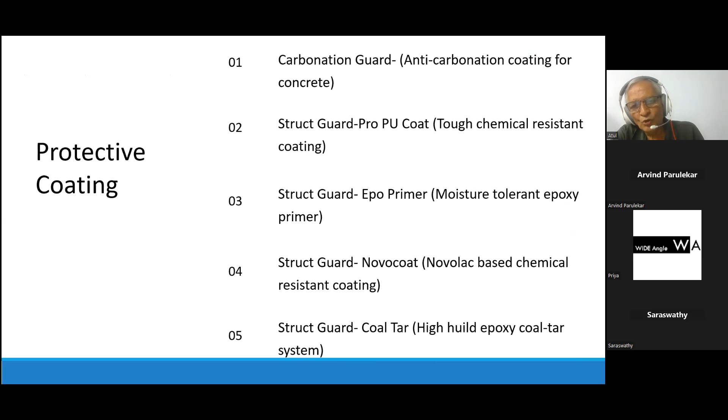Carbonation Guard, an anti-carbonation protective coating for concrete. It is a single component, 100% pure acrylic-based elastomeric coating based on acrylic dispersion, with excellent crack bridging and anti-carbonation with anti-corrosive properties. Carbon dioxide permeability is low. Advantages: preventive protection for reinforced concrete structures exposed to aggressive and corrosive environments.

Struct Guard Pro PU Coat. Struct Guard Pro PU Coat is a high build two component product. This product is suitable for use with Struct Guard Pro PU Primer and Guard Pro Intercoat. It provides a durable high gloss finish. Advantages: high resistance coating used in industrial and architectural coating systems. It is popular in the marine industry, and used with Struct Guard Epo Primer.

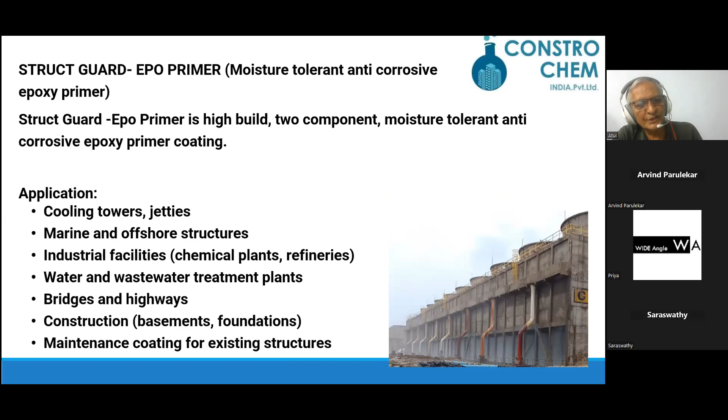Struct Guard Epo Primer is a high build two component, moisture tolerant, anti corrosive epoxy primer coating. Application: cooling towers, jetties, marine and offshore structures, industrial facilities.

Struct Guard Novocoat. Advantages: it protects the structure from corrosion from heat and inorganic acid. Struct Guard Coal Tar. Advantages: it provides outstanding anti-corrosive performance with excellent fresh and seawater resistance.

Struct Guard TPO. Application areas: factory sheds, warehouses, and cold storages, airports, railways, metro and bus transit stations.

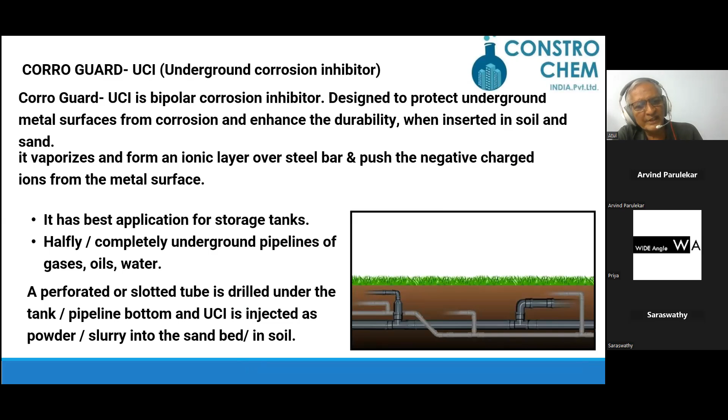Corro Guard UCI. Corro Guard UCI is a bipolar corrosion inhibitor. It has best application for storage tanks and completely underground pipelines for gases, oil, and water. A perforated or slotted tube is drilled under the tank or pipeline bottom, and UCI is injected as a powder slurry into the sand bed soil.

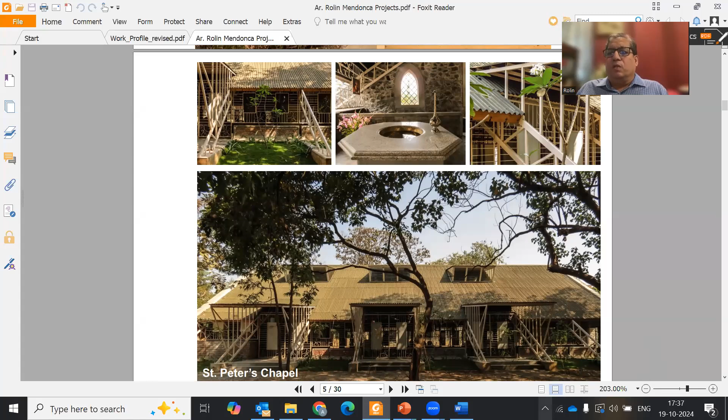What you see on top, the green color, is a material which came from France. It has a beautiful resilience, and the way the self-tapping screws place the anchors into the steel frame, into the purlins, and how it has been capped is really marvelous to see. This entire structure is reconstructed from the ground plinth, and the whole structure together with interiors cost us just 900 rupees a square foot - a very economical work.

The important thing to show in this webinar is that an architect can design in so many different ways depending on how the client puts the problem forward. Here we did not get permission to construct any new walls, so as you saw in the first slide's night view, there are no walls - the entire thing is like a cage. Even the BMC were baffled, and there was no problem.

You can see in some of the side views how the ventilators have been designed, and how the structure has been opened up to make entranceways on the side. You can see how the stone masonry wall has been slapped onto the old facade of the building, and all the apertures and openings have been maintained the same.

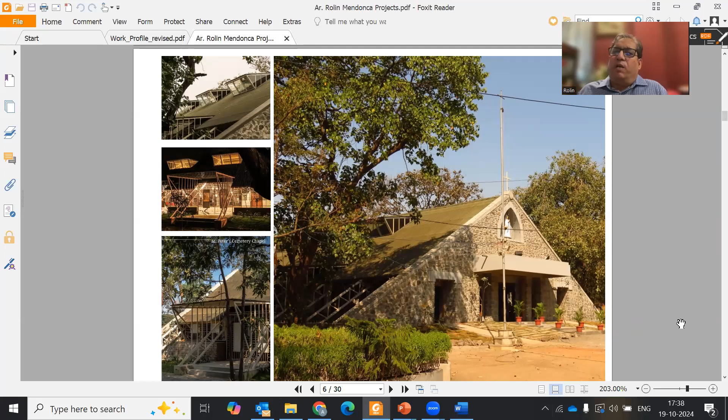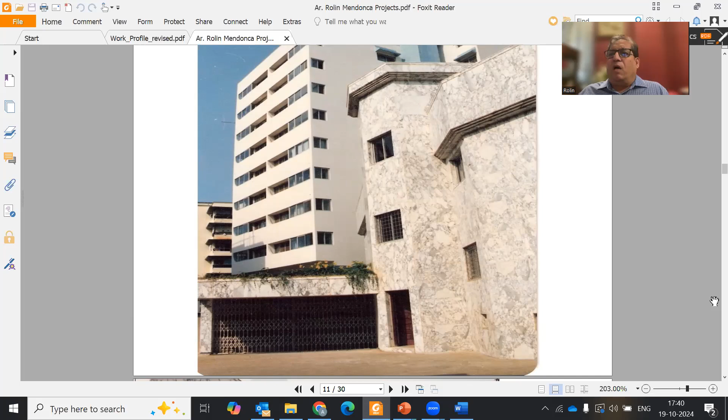This is the resulting building. It is for the USSR Consulate Trade Representation. The building in the foreground is the department where they have their offices, and the building in the background, the white building, is the one where they have their apartments. The building in front is fully cladded with Italian marble known as Carrara, and the building on the rear, the white color building, has been covered with what are known as stone tiles.

Now, in the 1980s, the Russians had mentioned to us that we are going to have an RCC building, RCC frame, but the entire building has to be covered. This knowledge was there with them in those years.

You can see how the building has been designed. The shape of the building has been given in such a way with the windows so that from the gate, nobody can fire a bullet, because this is a diplomatic site. So the walls and the type of construction is very solid, but yet it is made up of the same RCC framed construction that we have nowadays. Interesting to note is the projection of the top canopy, or what we call the crown. The water is not allowed to trickle down the buildings.

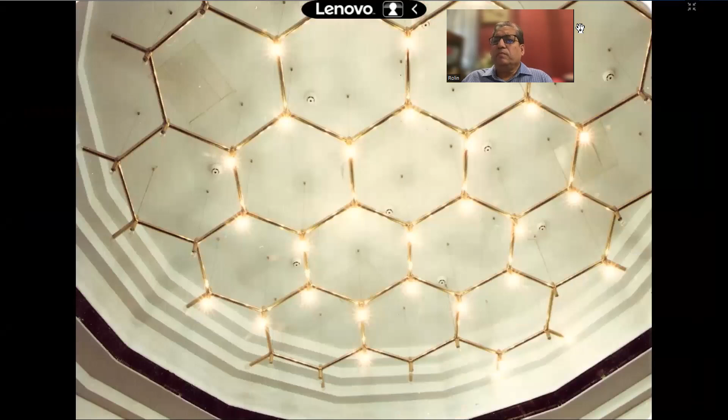This is the ceiling for the conference room which is inside. If you look very carefully, you will see a lot of devices like cameras, detectors, and all sorts of electronic devices which were installed in those days. This was made in what is known as the Jali Chapti method. This false ceiling is such that a person can go on top of it, and their secret service, KGB, and all those people can actually photograph or film whatever is happening inside the conference room.

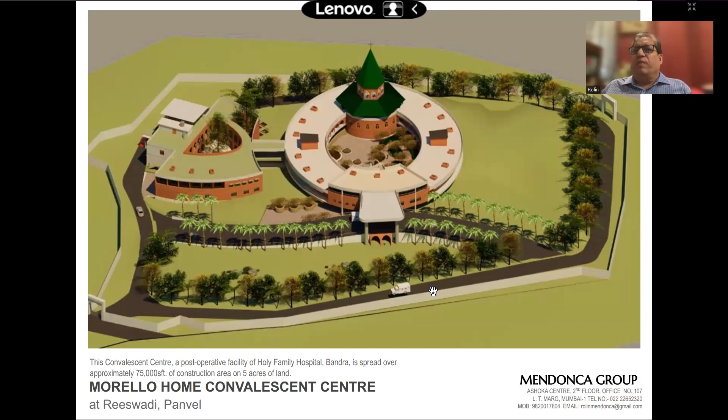Here again, they just wanted to pull down the building and reconstruct it. But the BMC told us that we could not put RCC, because if we did, the building would have to go in for redevelopment. So what we did, as you can see in the next slide, is build an entire load-bearing structure shell outside the building. The most interesting part is that while this building was being constructed, also as a charitable building, the client mentioned to us that he could not garner enough funds to do the plastering of the building.

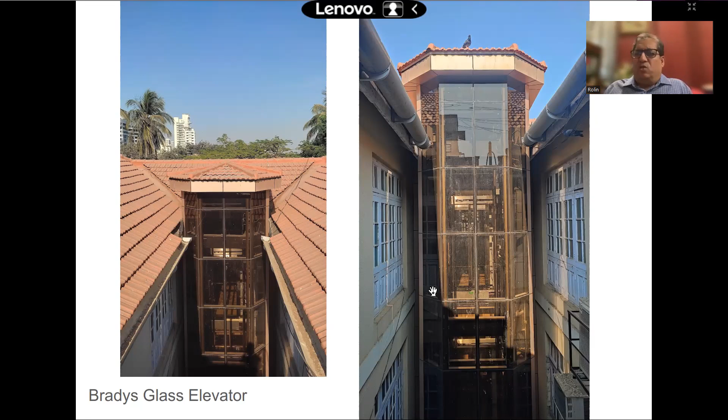This is what you can see as the lift. Through the glass, you can also see the staircase. Now, why did we do that? Because the people who wanted this elevator were very old, growing in age, and although it was a low-rise building, they were feeling quite frightened to get into a lift. So we made the whole thing glass, as you can see, even the doors are glass, so they won't feel trapped into a box. This is where I mentioned that as architects, we have to be very empathetic towards people, towards the clients. We cannot impose ourselves on them. Rather, we have to understand their needs and understand how the structural engineers deal with it. And we have a wonderful team.

And we have a wonderful team.

When the fire officer was entering the building through the ladder, he kicked the glass and put his foot through, and that whole ACP melted around his gumboots. It sucked him in, he fell into the fire, and died.

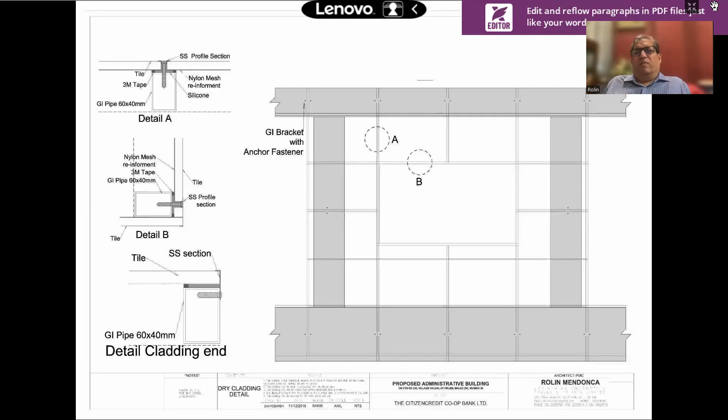I think that's the end of the presentation.